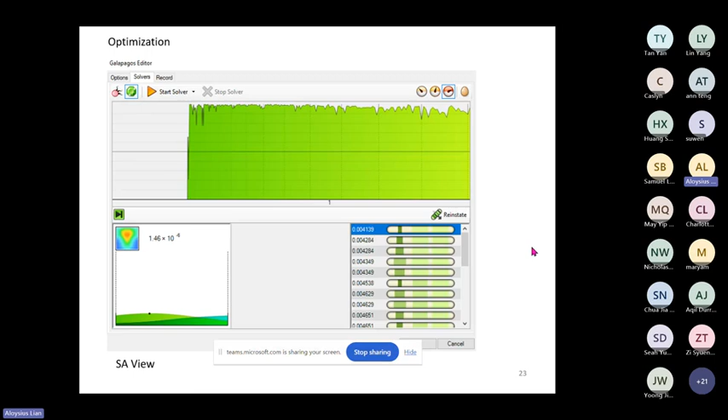When you first start Galapagos, you will see two options here — this is where you can choose what kind of solver you want, genetic or simulated annealing. The next one lets you start or stop the solver, and these are the other display options. Over here you can click on the result — this is the end result of your optimization. When you click on it in Galapagos, it should show up in your Rhino viewport as well as the Grasshopper slider viewport. This is an option for simulated annealing, and yes, that is the theory portion.

So just before we break, I want to show you all the file that you can download from Canvas, which is available here: Structural optimization.

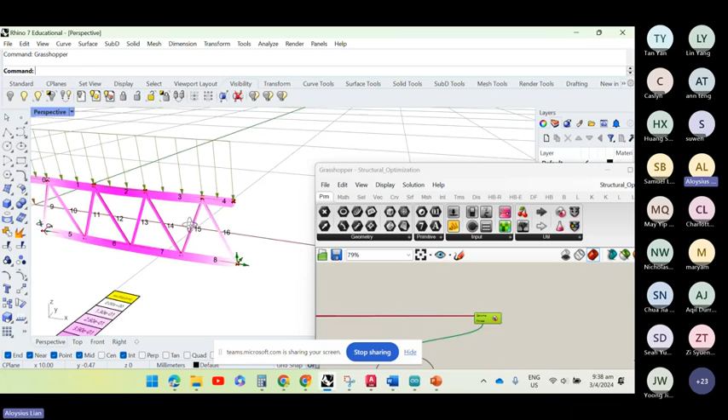You will notice that this builds upon what we have learned last week.

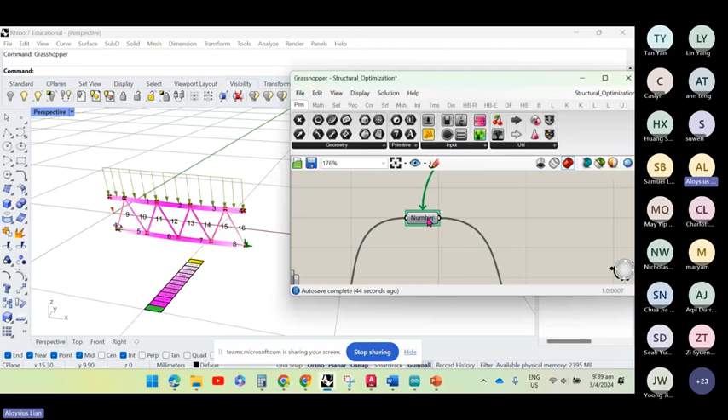So what happens here is there's a whole lot of Grasshopper components. What is more important is this part where you have Galapagos and then you have a fitness function. In this case, this is our maximum displacement.

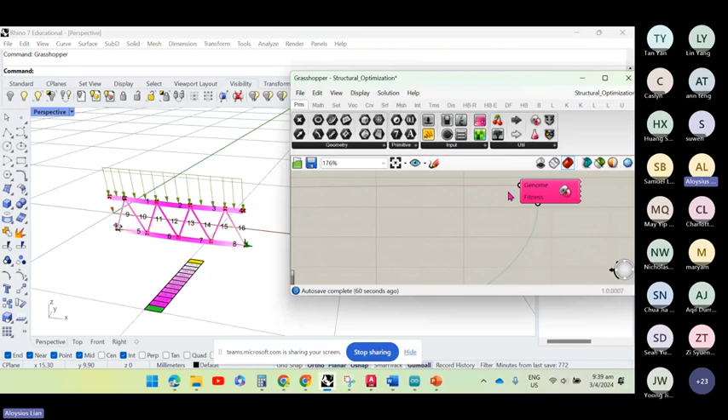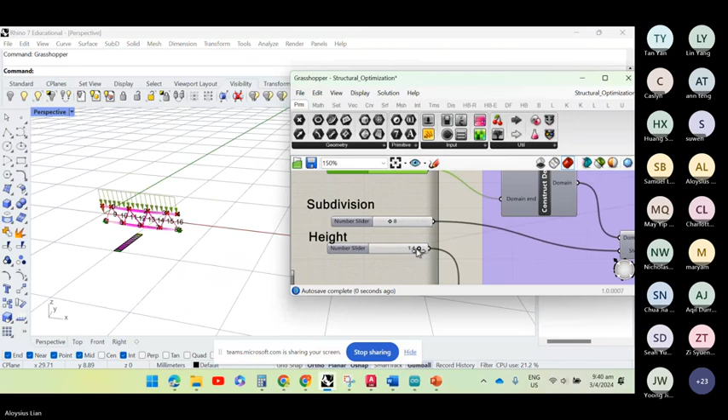Okay, so this value is around 1.274 mm, and this is connected to the fitness function. All the rest here are connected to the sliders, which control the length of the structure. Let me zoom out - so the length of the structure, the subdivision, and of course, the height of the structure.

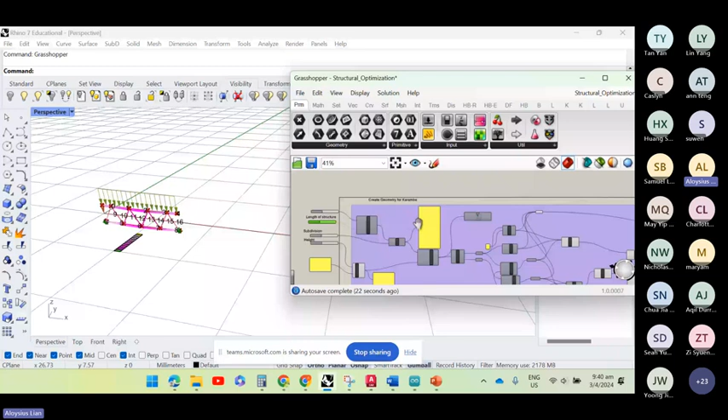To simplify, what I have done is only control the length and the height of the structure. So as opposed to you manually modeling all of this and then testing it with Karamba, if you connect this to an optimization algorithm, and I want to minimize, I just start with this.

You can see here that on the left part, the computer is automatically setting values in those sliders that I was doing just now - I was dragging and pulling, right? I just did them in a random way. Remember, if you notice, just now it was big, long, then it became short, then medium, then long again, then short again.

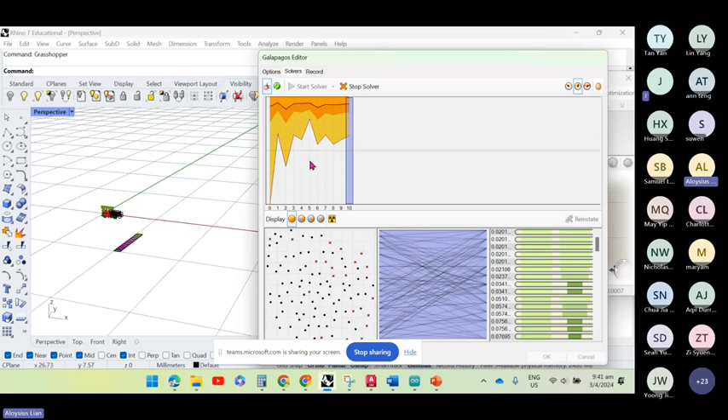All of this is the computer doing random start points that you see here in Galapagos until it tries to find the best solution. You will notice now that it has found the best solution because it is short and also not deep. That makes sense, right? Because you try to compress it as much so that there's no more deflection. The longer it is, the more deflection there is.

But you will realize that's something we can achieve with a human sense, right? But sometimes when we want a more complex solution, which we cannot derive ourselves, the computer can help us do it. We can set up the system, then go for a break, or go home and sleep, come back tomorrow morning, and you'll have the result for you. You don't have to manually do this one by one.

So that's the benefit. But if you think about it from another point, even now as we are talking, the computer is still trying to get and verify the result. It doesn't know as of now that this is the best solution, even though we as humans know this is the best solution - the computer is still trying out other variations.

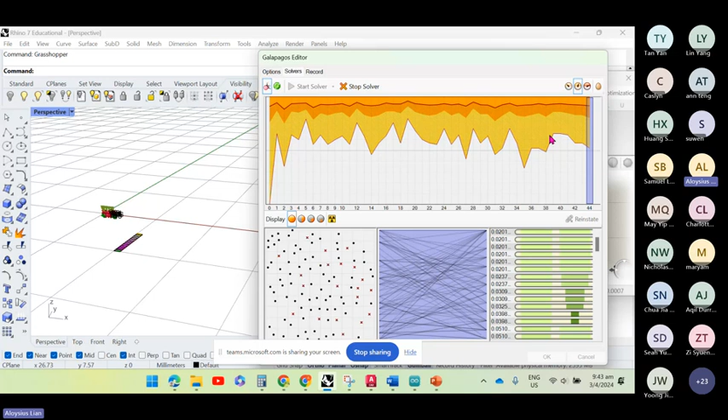So why do I want to show you this? Because you have to understand that not everything requires you to set up an optimization algorithm, right? Simple things that you already know the answer to, you don't need to do this. When you have multiple complicated variations, then it makes a compelling conviction to set up this system to derive the correct solution.

Okay, so I'm just going to stop the solver now. Okay, so now it's stopped. And what we can do is, as I click on each of these, it will show me the different solutions. Okay, and this will be 8.797. I can click on reinstate, and you can see that this is the variation where it has an 8mm deflection, because it's right at the bottom of the end result.

If I click on this on top and reinstate, this is the shortest solution, and of course with the smallest amount of deflection, 0.02 mm.

Okay, sometimes you may not necessarily want to get the best possible result for your design algorithm, especially when we come to think about it from an architectural or landscape architectural point of view. Because you also want to balance the aesthetics, right? Even though it may be the best and most efficient structure according to the engineers, we may want to choose something in between - something that looks more symmetrical, more proportional, and doesn't compromise on our ceiling height, and so on and so forth.

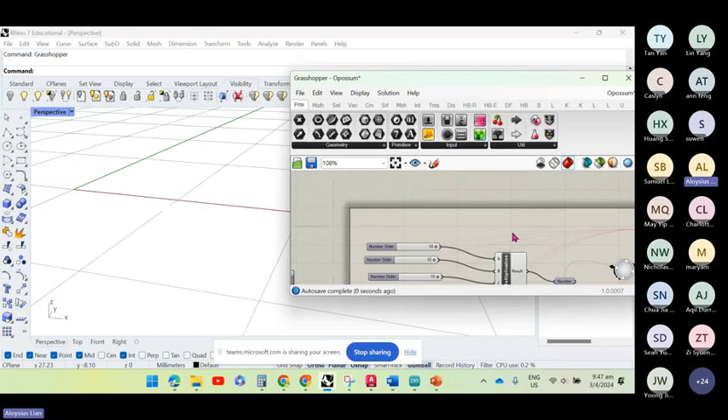Okay, this will happen every time you start Opossum for the very first time, because when you double click on Opossum, it will prompt you to input your email as well as your license number. Okay, so in this list, there's everyone's

name, just search for your own name. You can Control F if you don't know already, right? For example, your name has Zhi, then you can search. So Ku Zhi Luo, just put in your email here, and then this one will be your license. Okay, so locate your own license and then set up your Opossum.

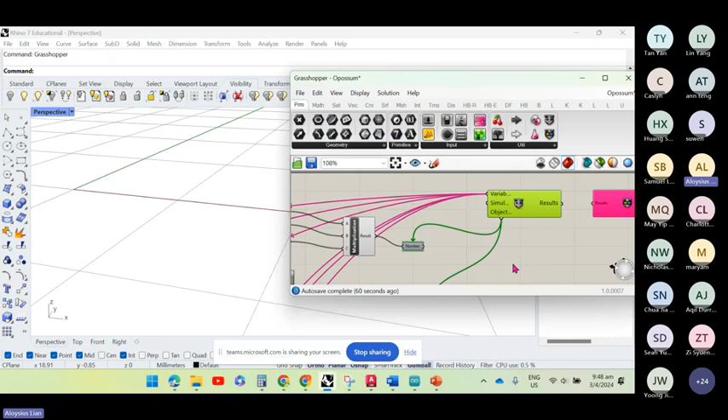Okay, so we will start again at 10. I will run through a very simple Grasshopper Galapagos multiplication example, and then after that, do it in Opossum as well.

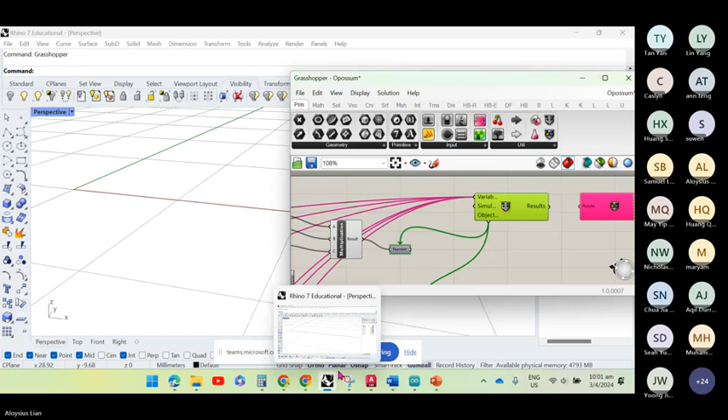Okay, for those who still cannot get it, there's a backup plan. Okay, the backup plan is here. Oops, here, sorry. So I'm going to put it in the chat. Okay, so this should work for sure because it comes from the developer. Everything came from the developers of the app.

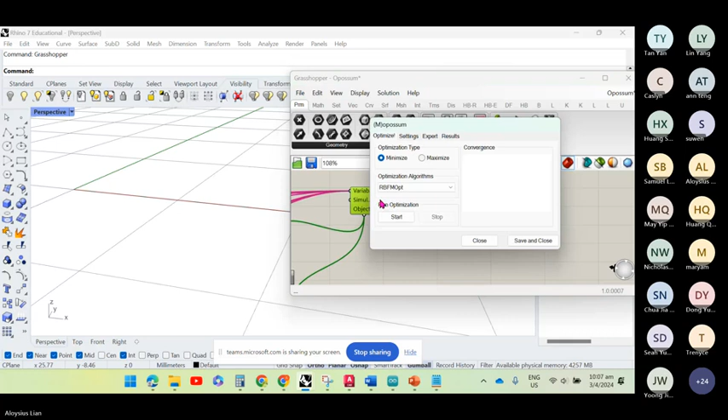So, this one is here, and this one is here, after you have searched for your name. It's okay, I can enjoy my bubble tea. Everybody should please try to fix your license.

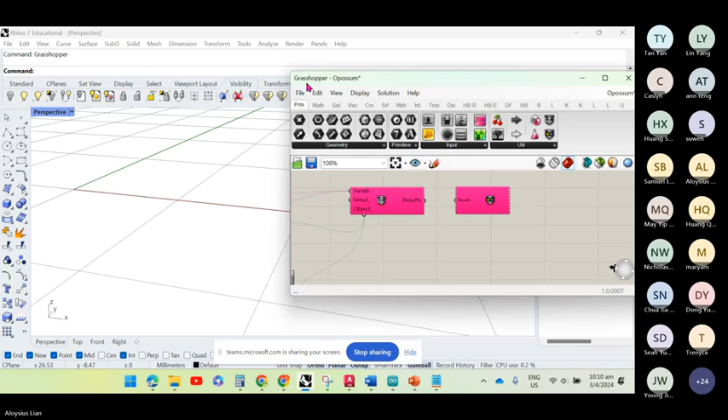So if you have not already, please download this Grasshopper file. So I presume everybody fixed it already, yeah? Okay, yes, good job. So now what we want to do is we're going to do a very simple example. Okay, so just go to Grasshopper. You don't need to open any other Rhino file. Okay, I'm just going to open this up.

So we're going to create a slider, okay, from 1 to 10. One smaller than 10. Okay, enter, and you have your slider. Okay,

and then you copy and paste two more times. Control C, Control V. And I'm going to rename this slider. I'm going to call this A, I'm going to call it B and C. Okay, by now you all should be comfortable with renaming. Just right click and rename it as A, B, and C. Okay.

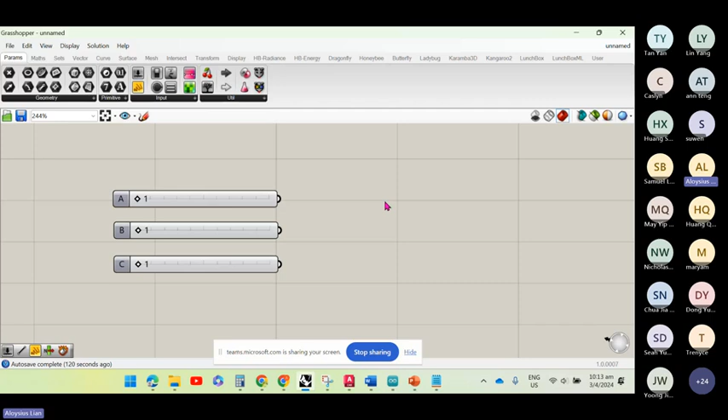So I will pause here till everybody has it. Everybody should have a slider from 1 to 10. Okay, everybody has. So now what we're going to do is we're going to multiply.

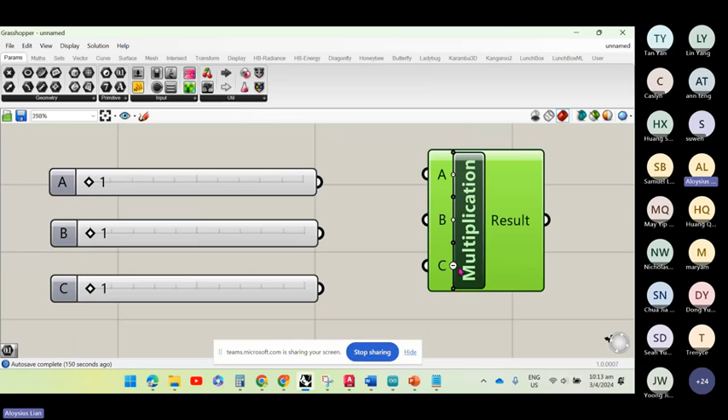So type multiplication. Okay. So zoom in, you can add a plus here. Okay, when you add a plus here, ABC, the stars have aligned, so you connect now. Okay, A, B, and C.

Okay, we're just going to have a very simple test of optimization. This is just to make it super simple for you all to understand what it means by optimization. So we have 3 variables, 3 sets of numbers from 1 to 10. And then we want to have the minimal number or the maximum number of the multiplication of these three numbers.

From human logic, it's very clear to us. The minimum number will be 1, because the smallest of each set is 1, so 1 times 1 times 1 is equal to 1. That's the smallest possible number. The maximum number shall be 10 times 10 times 10, which is 1000.

So it's very clear to us, but it's not so clear to an optimization algorithm. Don't mix this up with AI - this is not AI. Optimization is using a set of mathematical formulas, depending on what kind of optimization algorithm you have chosen, to get the best possible result within the shortest amount of time for that particular algorithm and equation. It does not have any intelligence. It does not take in any value that you have given it before, like an LLM, large language model, which derives intelligence. It does not - it just takes a formula and applies it to your fitness landscape.

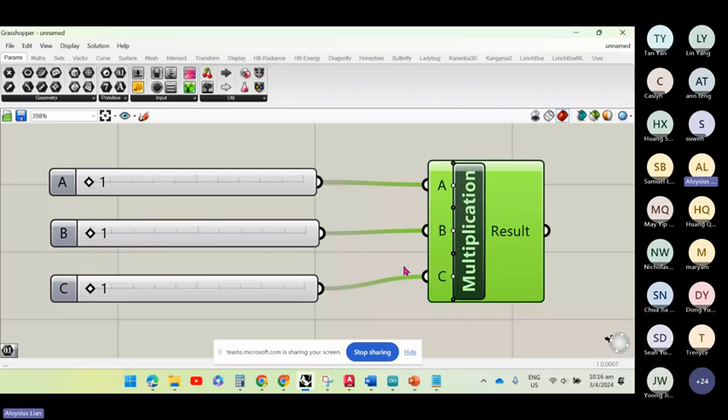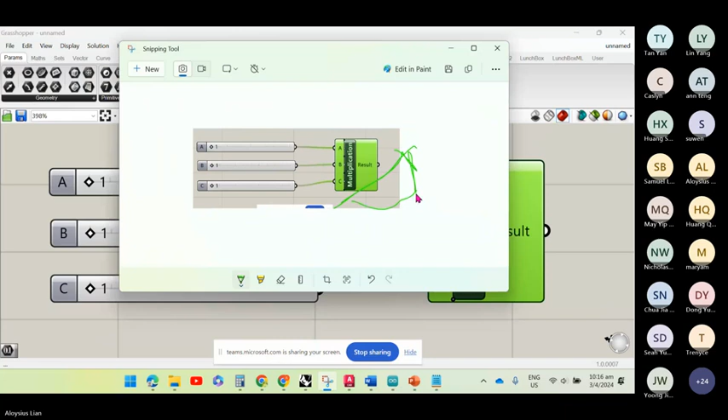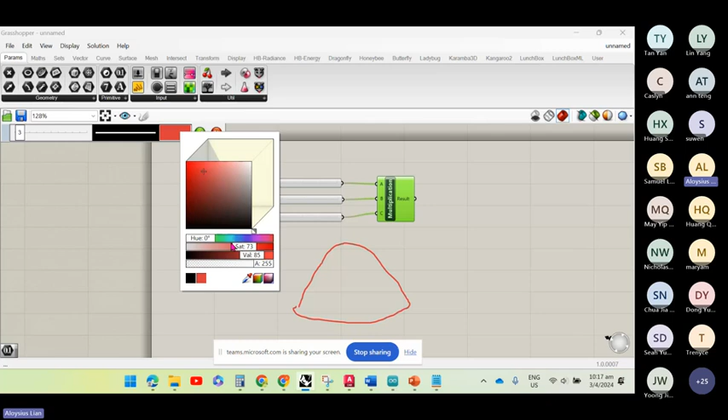So when I draw that diagram again - remember we had that diagram where we had a nice green hill? This is the hill, right? Maybe I make the hill bigger. In fact, I can just sketch here. Okay, I have the hill, remember? And then I have the human, and then I have the flag.

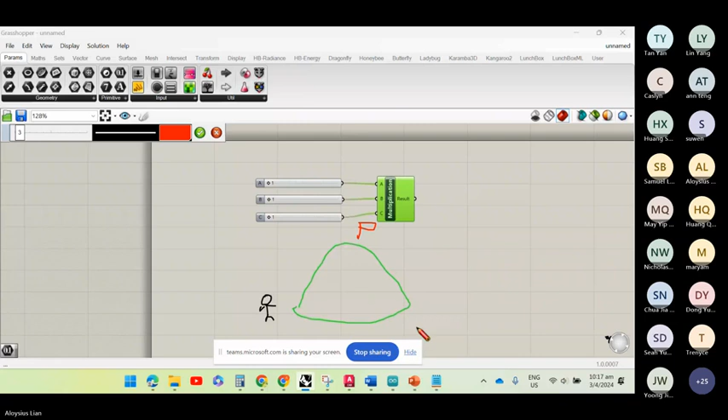So presuming the best answer is here, right on top of the hill. Remember from the sketch - the entire hill, the starting points here, all these starting points, it could be here, here, here, it ranges from 1 to 1000. All of this hill here, the results range from 1 to 1000. And of course now we know, for this particular example, the best result is 1000.

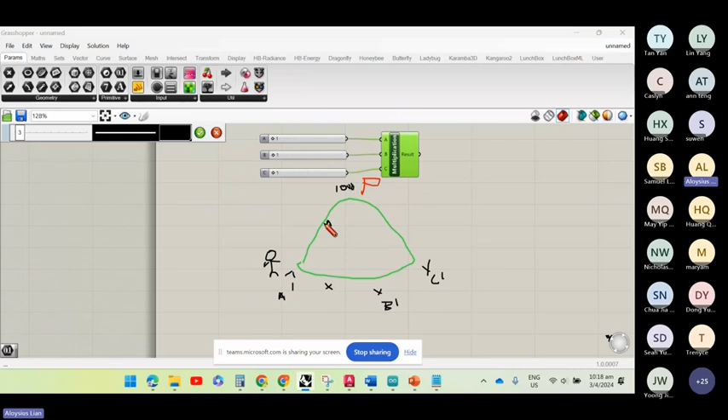You could start off at here at 1 for A, and then maybe B is 1, and C is 1. Or here A is... sorry, A will be 5, B is 5 - it's halfway - and C is 5. For the end result of times 10 times 10 times 10 equals to 1000.

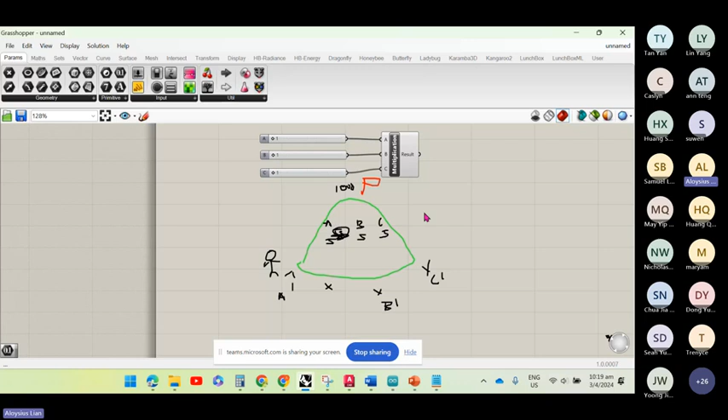Okay, all clear from this example? You all must understand this as a basic principle first. Once you understand this basic principle, you can apply it to any design algorithm - for building, for landscape, for geography, for computer science also. Clear, right?

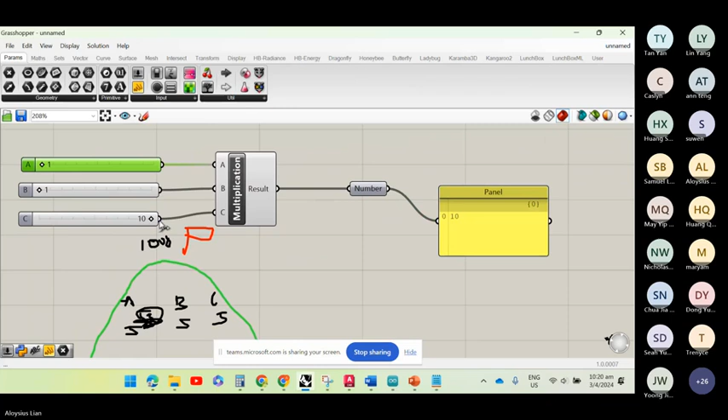Okay, so now, to make it simple, I'll just create a number container - it will contain all these numbers. I will have a panel to show the output. So 1 times 1 times 1 equals to 1. I drag it up here. 10 times 10 times 10 is 1000. I'm going to put it down again. You see these values will update themselves in the panel.

Okay, this is the output.

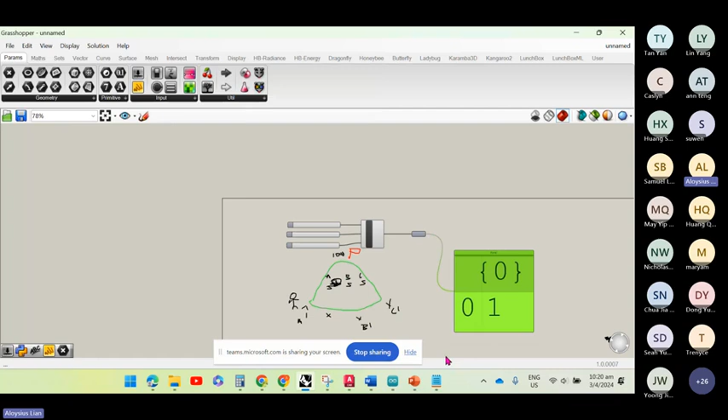Okay, so now we are going to use Galapagos. If you have successfully installed your Opossum, you will see Opossum right below Galapagos under Utilities. Or we can also simply just double click and type Galapagos.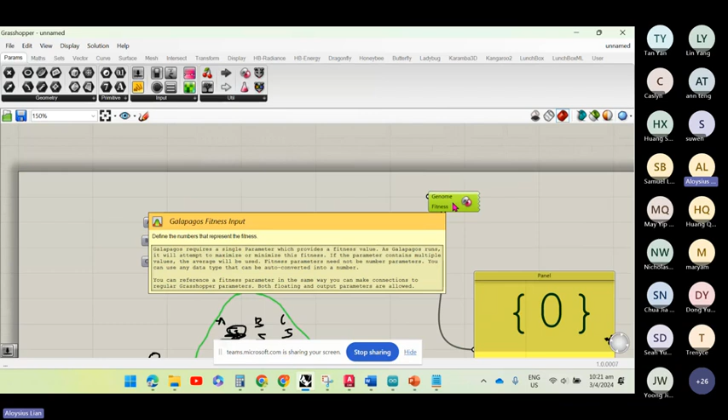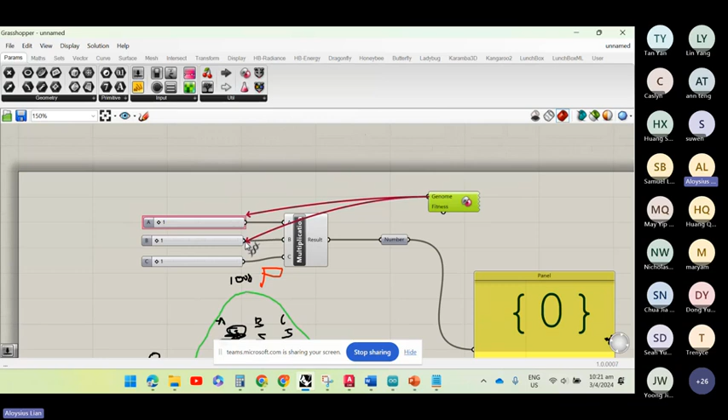So the difference between this and other Grasshopper algorithms is that instead of you dragging from here to here, left to right, you have to drag from genome to the slider. And if you want to have multiple, you have to hold Shift on your keyboard. So when you do this, Galapagos will know that these three are your inputs.

And now the fitness is this. This is the end result of whatever you want to test, which in this case is just a multiplication algorithm.

Now you double click. And you can see here that you can maximize or minimize the fitness. So in this case we want to maximize, because just now I drew this sketch to get the maximum possible value, which is 1000. So we will leave all this as the default.

After class, you can go and test this. For example, you can set the runtime limit to a maximum of maybe 1 hour. So next time when you go out to work, or for your studio, you set up your design algorithm, press this, then go for lunch. When you come back, you'll have the best possible result within 1 hour, and you can check from there. So this is how you can use this.

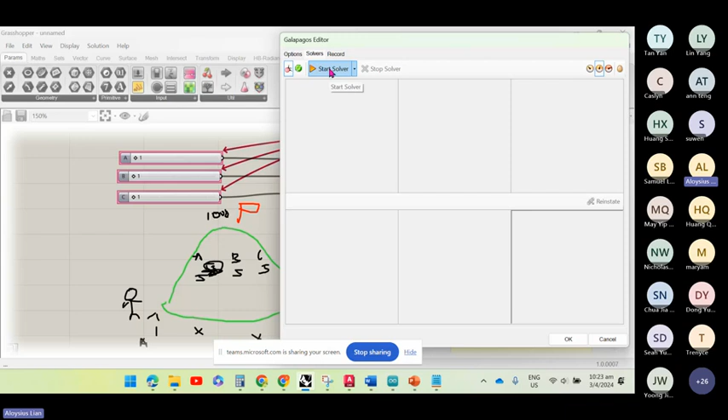But other than that, let's go for the solver. Use the default one, the evolutionary solver, and simply click Start Solver. It will start generating for you. See, the slider here is doing its stuff, and the values here are also updating itself. This is a very simplified version just to show you how the mechanics of this system work.

So again, to repeat what we did before the break for a practical application in terms of design for a structure: this is just a simple calculation of values from 1 to 10, 3 of them, and what is the multiplication result. As humans, we already know it should be 1000, right? But to the computer, without AI, just using optimization, it does not know.

That's because there's no background to it, it is to itself. If I were to dumb it down as an analogy, what the computer will presume is this: it will look at your sliders and know there are 3 sliders, and that each slider goes from 1 to 10. It will determine its own fitness landscape, from 1 to 1000, which is what our hill is now. By now it has already stopped - it took 55 seconds to get this result.

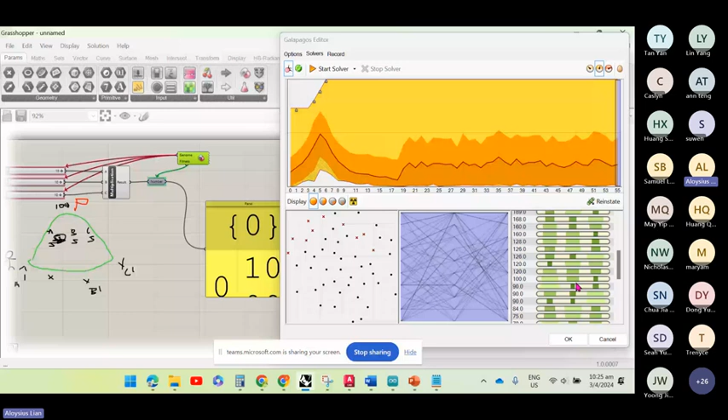For you to use this as a designer, this may not be just numbers. In future, like what I showed you just now for the structural example, you can always click on a particular value, click reinstate, and visualize how it looks in the Rhino viewport. Then you will know how it performs according to the quantitative assessment you want for it.

Okay, so you all get it now.

We can always just go back. If you go back to the options, now I want to try to minimize. So I click on this negative button and it will go to minimize. Go to the solver again, and press play to start the solver. So you see, it's the same thing, it's starting to do all these values again.

What you see here on the left is the evolutionary algorithm. If you imagine this square grid as the fitness landscape, wherever there is clumping is where you will have good results, and where there is no clumping, it will be the not-good results. So the not-good results will not have any children, so it does not clump and create another value. That's actually what it means by applying a genetic algorithm.

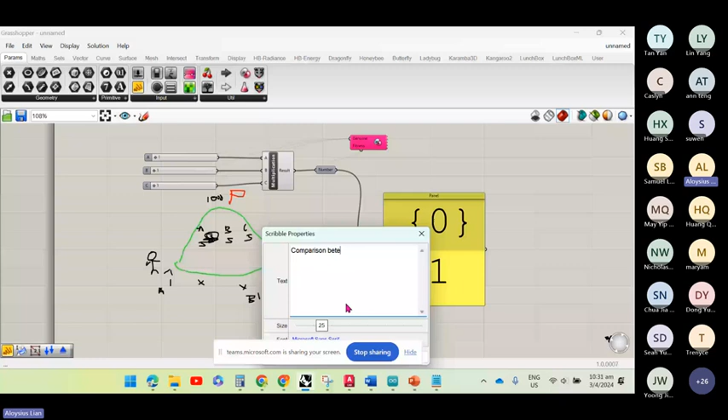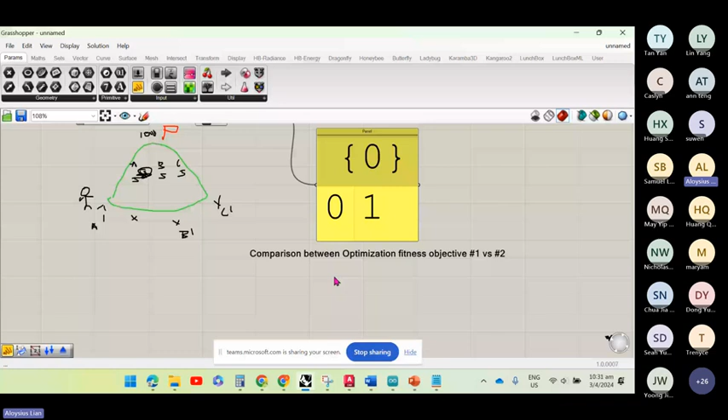There could be a couple of ways. It could be done online via MS Teams, or you could even sketch here, create a scribble, and then analyze the comparison between results: optimization, fitness objective 1 versus 2. You can type whatever you want inside the Grasshopper definition, and our TA can look at it. So there are many options in which you can represent your optimization problem.

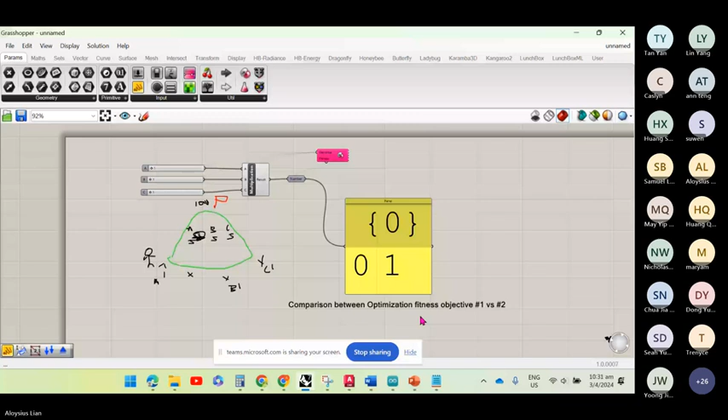Just make sure that your file size is not too big, especially if your definition requires a Rhino file for the surface or whatever you want to run the optimization for. So for those who are cross-faculty and do not have an architectural or landscape architectural problem, feel free to discuss with the TAs on how you can apply it to your own faculty.

Which is what you should do later after this class. So, all clear on the exercise? You're supposed to have two, both Galapagos as well as Opossum, which I will also show you using this very simple example.

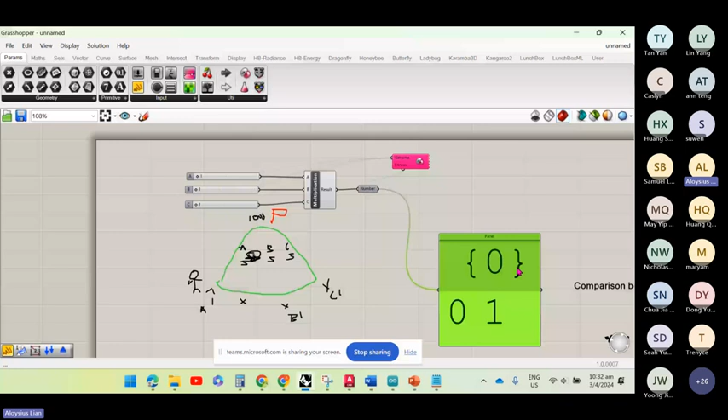So now what we're going to do, if there are no questions, is move on to Opossum. You can reach it from here, or you can also just double click and type Opossum.

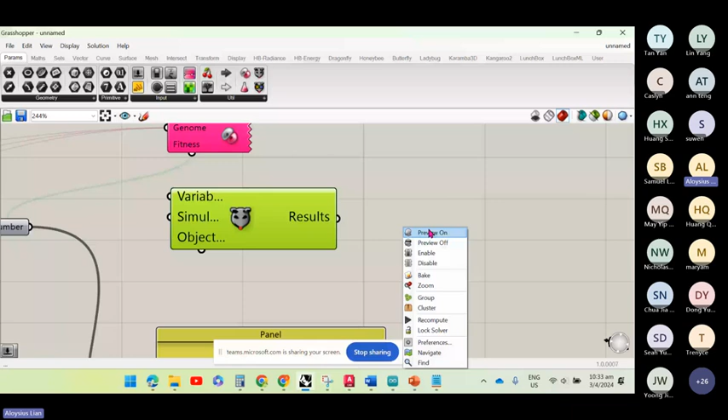So this has a variable, a simulator, and an objective. We will just keep it to the simple portions first, so we just use the variables. Same thing as what we have done for Galapagos: go from variables to the slider here. We want to shift so that you can have multiple variables.

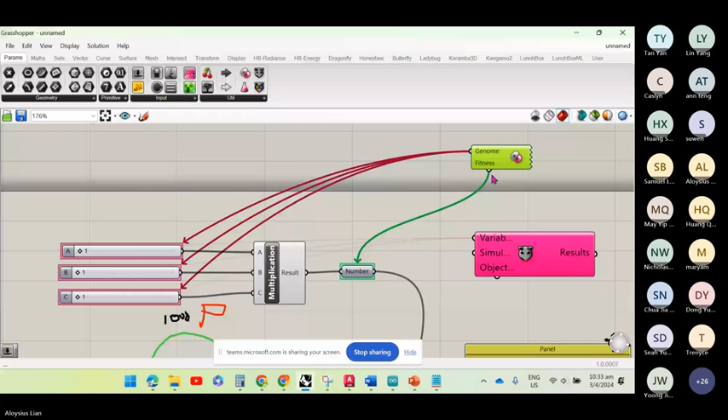So I'm just going to move this up, and this one is my Opossum one. My fitness will also be the end result of the multiplication.

Now you just double click. For those who are opening it for the very first time, you will see the thing that I showed you just now. You just need to key in your license and your email.

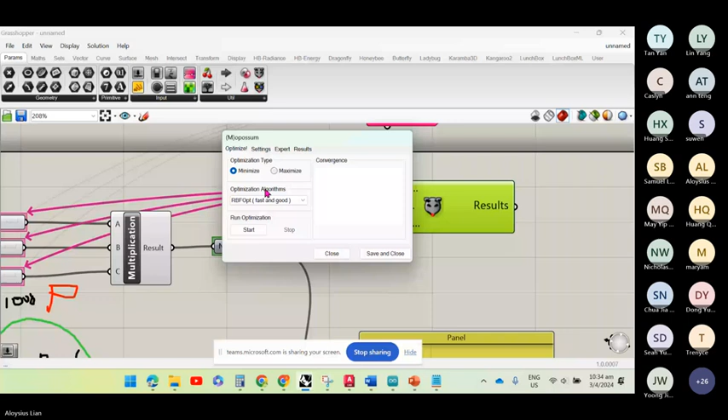It's similar in terms of the interface with Galapagos, but they have simplified it by a lot. So just minimize and maximize, and you can choose your algorithm: RBFOpt, CMAES, and CMAES from start point. I will not go into the technicalities because it's more mathematical than design-wise, but like I repeated just now, different algorithms function for different questions. You will just need to test them out, and then you will find which ones perform the best.

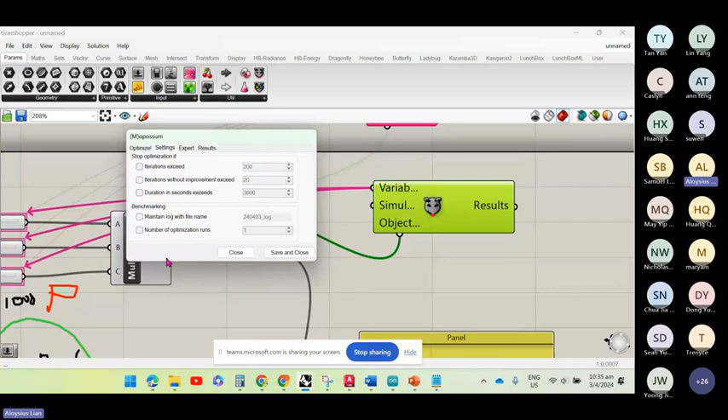So now let's try to maximize. The rest of this you can leave as the default. Essentially it's the same thing about how much time you want to spend on it in terms of seconds, and whether you want to limit the amount of iterations—meaning the amount of results from the multiplication of each of these three values.

Okay, so I'm just going back to the results, and let me just do it like that. So: maximize, RBFOpt, and then just click on start.

So you can see here the significant difference between Opossum and Galapagos. Do you realize? After 13 iterations, it already knows that the best possible result is 1000. Why is that so?

So it comes back to my lecture just now. RBFOpt is a black box optimization. It's similar to the diagram that I showed, somewhat similar to this fence. But instead of a fence that is done with direct optimization, which means it's a rectangle within a rectangle, it fences it in an even more defined way.

So what this particular algorithm does: it understands the fitness landscape, which is from 1 to 1000. Then mathematically it will create its own fence, and that fence will not be as simple as the one you saw for direct optimization—it will be more nuanced according to the mathematical principle. So maybe it will be something like this as an analogy. This versus direct: direct simply quadrants it up, but RBFOpt will already take 1 to 1000 and draw a very specific fence.

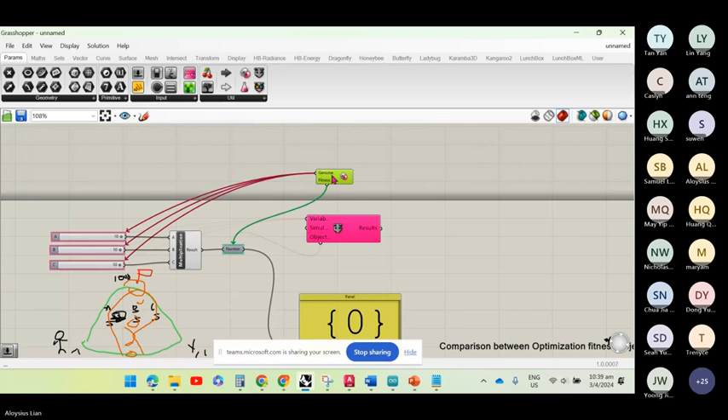Okay, so I'm going to save and close now. And what I want to show you, and why I also want to share with you Opossum, is the cool thing about Opossum is that there is also this Performance Explorer, this button over here. You can click on it and you can visualize your results.

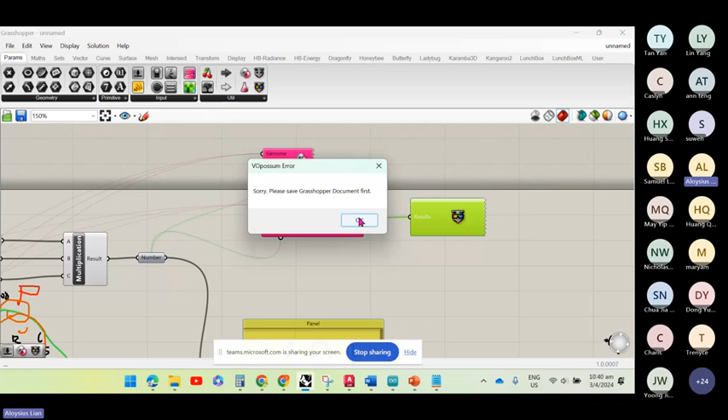So this one you can connect from left to right. After you have done this, just double click. It will ask you to save the Grasshopper document. Why? Because when it's a very complex multi-objective algorithm—well, this one was only single objective—but when it's very complex, Grasshopper will hang. So this is a safeguard against that. I'm just going to save.

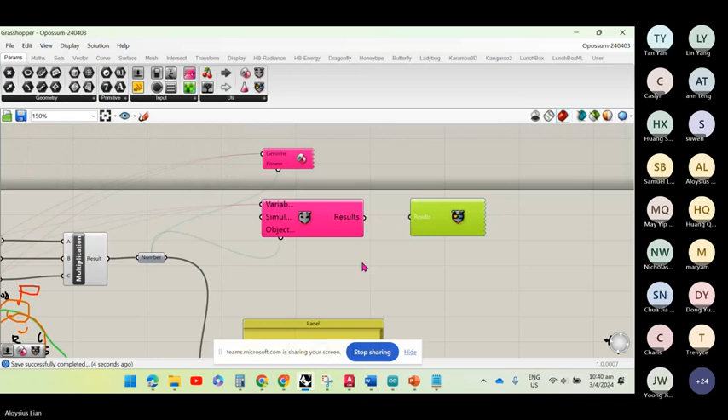Okay, then I double click. And then you will see this is the fitness landscape. Some of you who watch football, soccer, will know the soccer player graph—he can pass very well, he can score very well, whatever. Like in FIFA, he has this thing, right? This is somewhat similar. It's just showing you the fitness landscape of value A, B, and C.

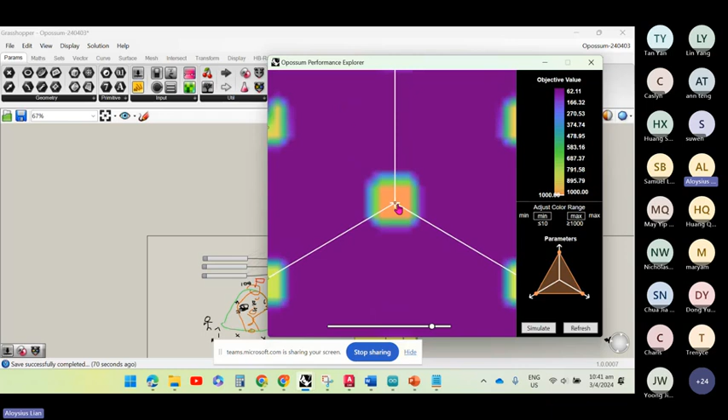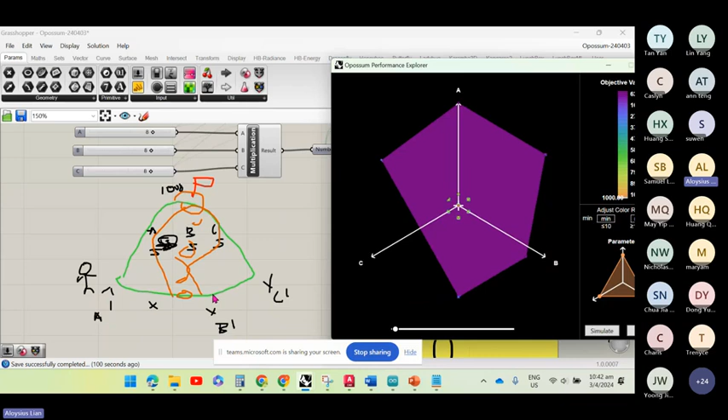So in this case, because it's maximizing, it starts from a value of 1 here, to 10. 1 to 10, 1 to 10. And with the mathematics, it's able to quickly set up 1, 2, 3, 4, 5 points here first. This is what I was trying to explain with this orange sketch. Then from there, it will take another of these—1, 2, 3, 4, 5, 6 points. And then the last one is inside here.

And the 13th iteration is just to double check. So you get it, you all roughly get what I mean already.

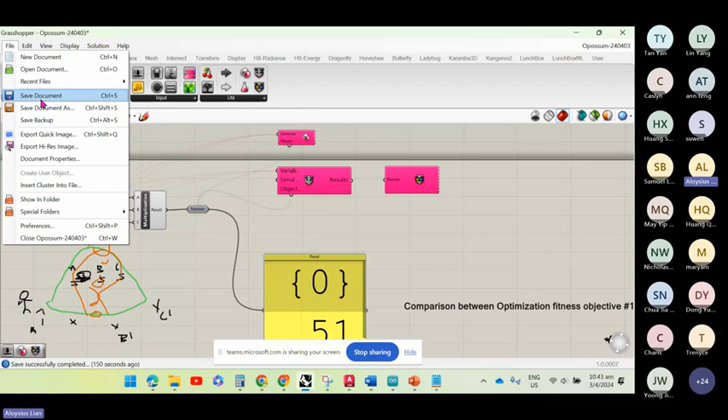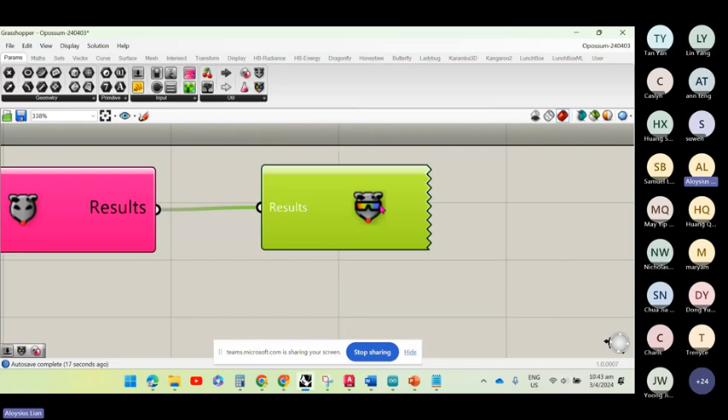You have to double click here. You have to save your document first—save file, save your Grasshopper. Connect from here to here. And this button, you get it from here, the Performance Explorer—or you can just double click and type Performance Explorer and connect. So after you have connected it, just double click and it will run in the background first, the visualization, and then this will show up.

And you can see here, you can click on it at any point of time to see what are the performance of it.

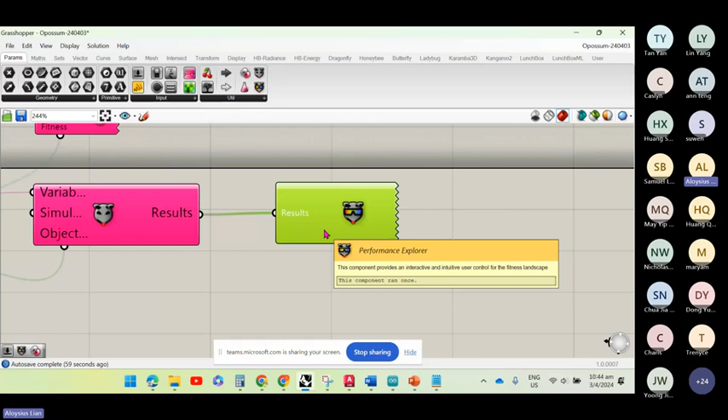Nobody can open? Really? Okay. Do you all have this? And when you double click, it has this. And when you save and close, do you save and close, or do you close?

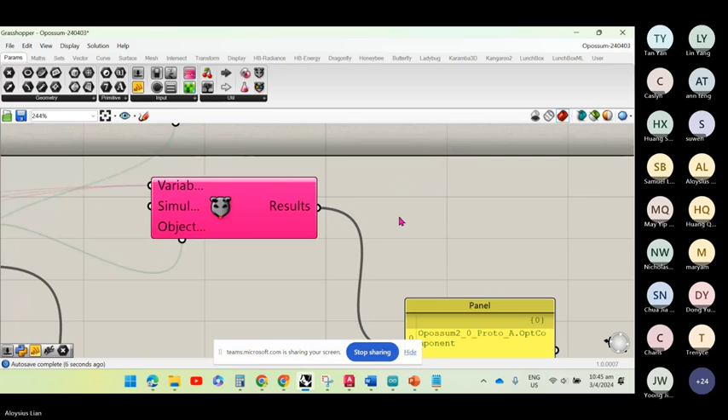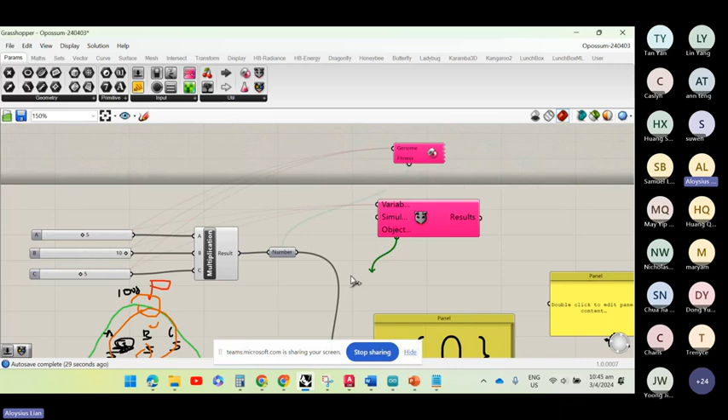Okay, I redo from scratch. I delete this. I use this Opossum, put it down. I will connect the variables—hold on to shift. And then again this one to this objective. Double click here.

So now let's try minimize, instead of maximize. I will start, okay, it will calculate.

So this is also a good example because it's dumb, right? It's not AI, right? Now it's taking 100 over iterations, because technically, by right, there are 1,000 possible values—10 times 10 times 10.

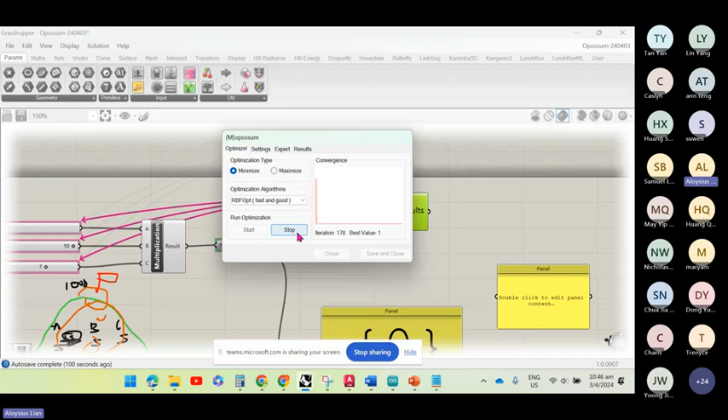Okay. So if you're impatient, you can stop—optimization stopped by user, best value 1, click OK. And then you save and close. Then after that, you use the Performance Explorer, click on here, put here, connect this, and then double click.

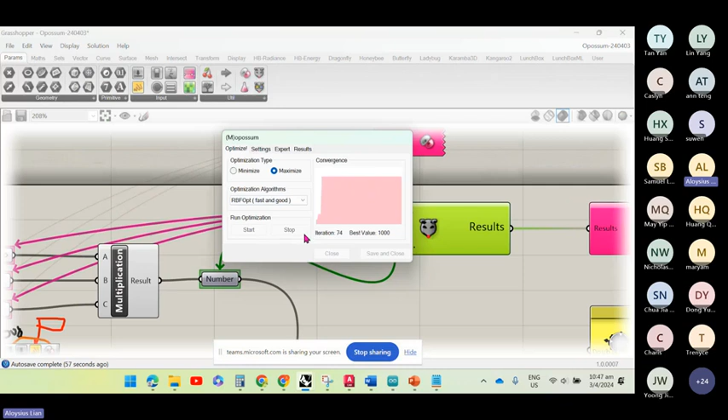Okay, let me save this, and then I will close. Probably this is what happens to yours. I'll close this, now open again.

The Fitness Landscape Performance Explorer will only show up if the iterations have all been completed. So we have to patiently wait—otherwise, you will not be able to generate the screen.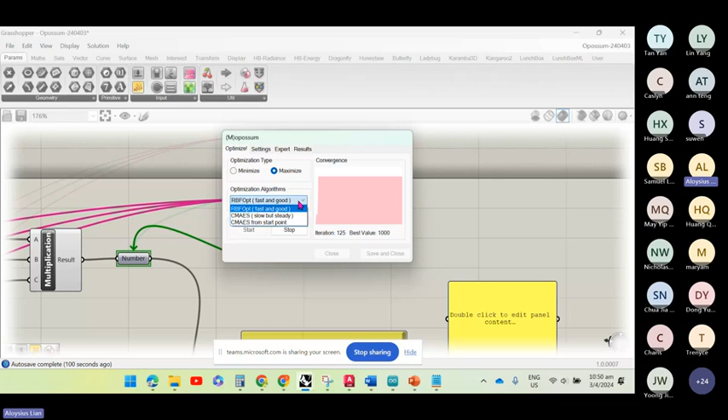Okay, so this may take some time. I'm just going to close it first.

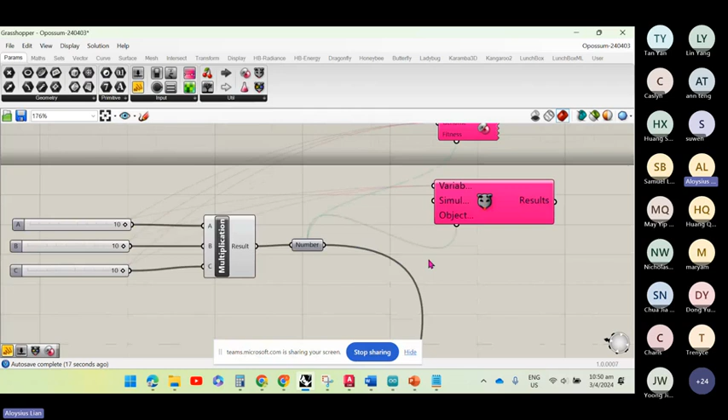I just want to show you one last thing before we have the tutorial session. Okay, in this case, right—let me just separate Galapagos and Opossum.

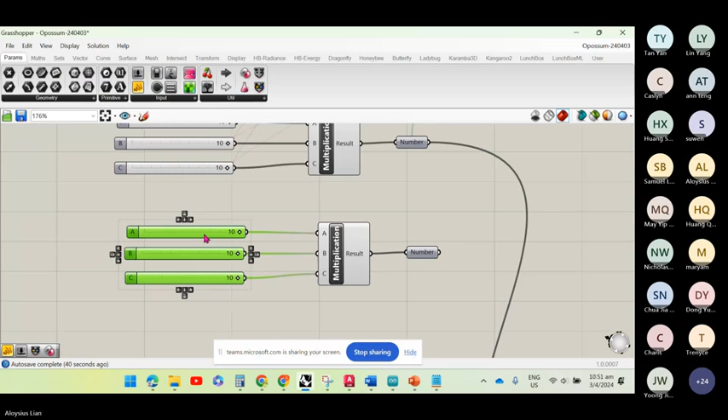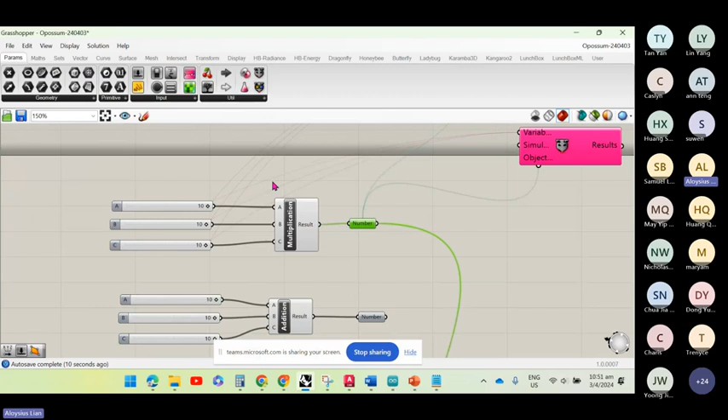For Galapagos, let's say for example, let me just fictionally copy and paste this, so I have multiple objectives. Maybe I will delete this, and I'll call this addition—so I'll add all these values together instead. And this is my other objective. In real life, this could be like for landscape architecture, you calculate the number of trees versus the amount of shading from the trees.

And in Galapagos, you cannot add another objective—you see, when I hold shift, it doesn't work. It will reset from this to become this, okay, you see here? But for Opossum, let me just set it to here also.

You can have multiple variables. See here, I have multiple variables. And I can also have multiple objectives. So two objectives, six variables. Galapagos, you can also have six variables - you can have as many variables as you want, but it's only single objective. See, when I try to add another one, it will toggle to the next one. So that's the difference between a single objective algorithm versus a multi-objective algorithm.

But bear in mind, too many objectives will increase the computing time. HDB actually wanted to use this to optimize housing, but they realized they have too many objectives already. For example, you have to balance - one of the key things is views to substation. People don't like to stay next to a substation, so you have that objective. Then you have proximity to existing transportation nodes like bus stops, and unhindered view from neighboring blocks. So many objectives already, just naming three. And to influence their layout becomes a very complicated computing exercise. But if you go to the bigger firms, some of them have invested in mini supercomputers.

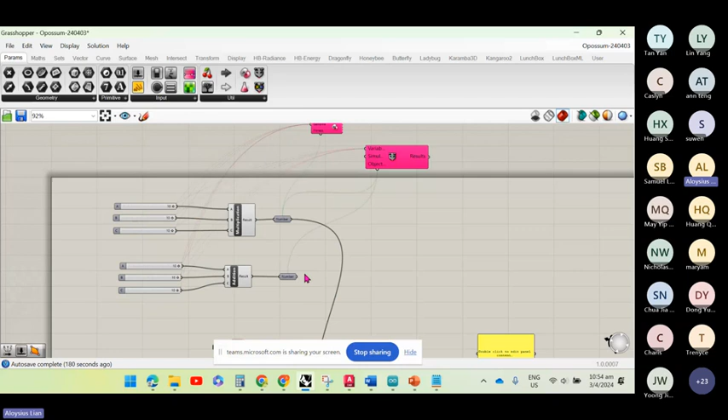He never put the number module. So from here I can also optimize. I can start, and you will do the multiple iterations. You will also realize - let me just stop this first.

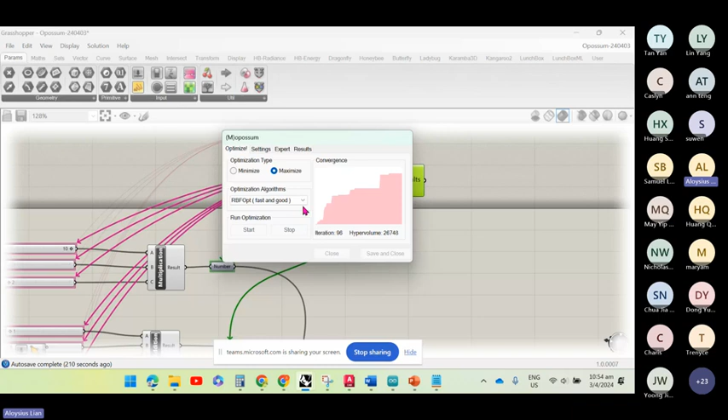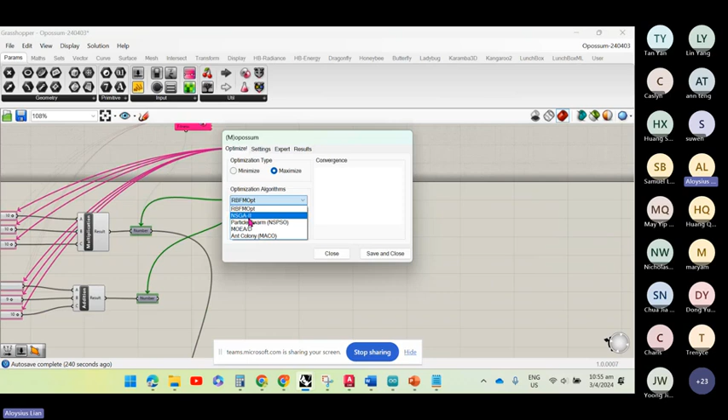If you do it as a multi-objective optimization, you can see that... I have to close and double click again. You will have other kinds of optimization solvers, for example NSGA2, which is used by Dynamo, and for example Ant Colony. We can just try with this, and you'll see it has different results. In fact, you can see here the calculation of the iterations is significantly faster than the previous one - it's in terms of units of 5.

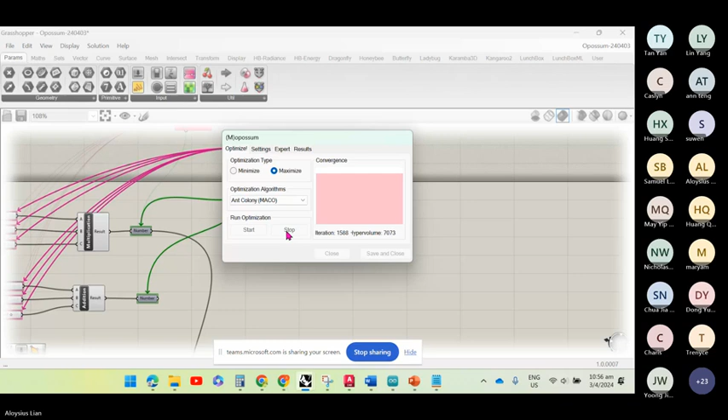So the Performance Explorer is just for you to visualize, right? You do not need to have that for your exercise. You just need to complete the optimization with the use of single and multiple objectives. And I'm not forcing you all to wait for the run to be completed. You can stop it at any point of time. But it's important to show that you know what is the end result that has been optimized by it.

So you see here under the Ant Colony optimization, after I stopped it at, say, 1,000 iterations, the best possible result was 10,9,9,9,10,8. It's not the correct result, right, that we know as humans - it should be 10,10,10,10,10,10. So always validate after an optimization algorithm has completed its run, because the mathematics of it has to be verified by you as the design algorithm creator.